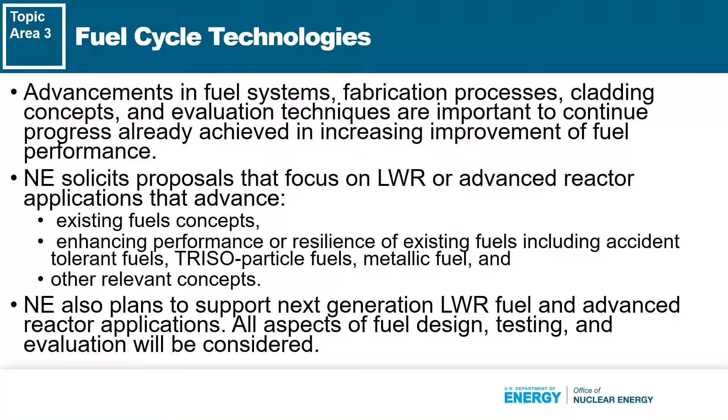The slide covers the DOE team up with industry focused on ATF. The industry partners, as you can see, are Framatome, GE, Westinghouse, and GA. Each vendor is pursuing their own designs, as example in this table. These technologies include coated zirconium claddings with and without doped UO2 pellets, use of FeCrAl cladding designs, and SiC cladding and higher density fuels. DOE is supporting each vendor in their research, development, and qualification efforts related to their individual designs. DOE develops and maintains fuel testing qualification infrastructure, performs independent testing and evaluation, and specific tests and PIE as requested.

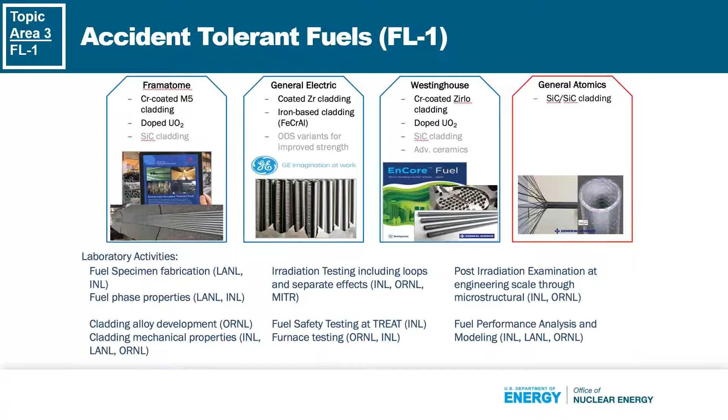This slide provides a high-level outline of suggested topic areas for university-led innovation that aligns nuclear energy research being conducted at US colleges and universities with DOE missions and goals. In practice, this generally means innovative solutions and research that looks to enhance the state of the art for a particular physical phenomenon identified by the researcher. NE's ATF fuel cycle research and development provides support to the industry in 3 major areas: in research, development, and qualification efforts.

One meaning to these terms are research, expanding the state of knowledge in a specific area by performing experiments, preferred and/or new evaluations of existing experimental data that create or expand existing models. Development may be implementation of innovative research concepts from an engineering perspective that incorporates integral effects, or the practical application of the innovative research. Qualification may be establishing safety-related performance boundaries or the demonstration of device processes, etc., to produce consistent outcomes of the required accuracy and precision.

Innovative NEUP proposals are suggested to fall into the research category, advancing the state of physics for a specific phenomena under appropriate conditions, while recognizing the applicant's freedom to be innovative in their submission. For FY23, NE is requesting innovative research that enhances safety and performance in the following suggested areas. The applicant is suggested to include the specific area of research, a discussion of the challenge and innovation proposed, discussion of the appropriate figures of merit, etc., to characterize their proposal.

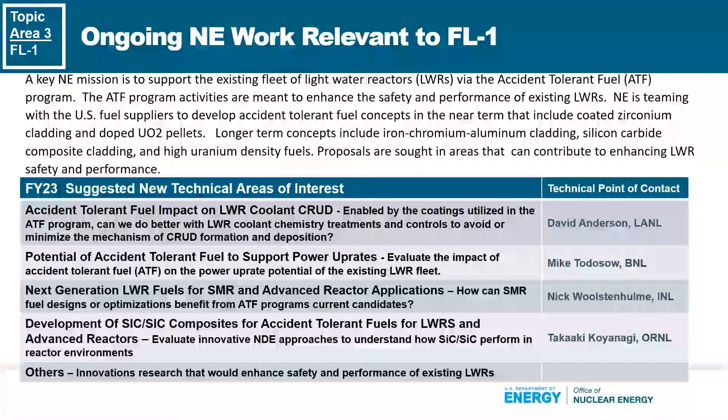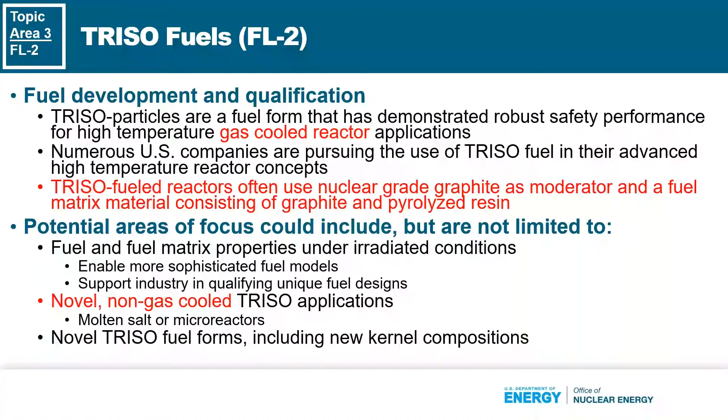Thank you. Okay. As I mentioned previously, industry is producing a broad range of TRISO-fueled reactor concepts. The following is just a sampling of a much larger set of exciting work that is happening. X-Energy is being funded through the DOE Advanced Reactor Demonstration Award. If you keep up with the news, you probably saw the announcement yesterday that X-Energy and Dow Chemical will collaborate to deploy the XE100 technology at one of Dow's US Gulf Coast sites. So that's very exciting.

Kairos Power is developing the Hermes TRISO-fueled reactor that uses a low-pressure fluoride salt coolant. BWXT is working on the BWXT Advanced Nuclear Reactor and Project Pele, both of which are micro-reactor configurations that use TRISO fuel. The latter design is funded by the Department of Defense Strategic Capabilities Office. So that's sort of the industry-wide picture.

Within the DOE's lab-directed work, the AGR campaign has and continues to hold critical importance. The current focus is the AGR 5/6/7 post-irradiation examination, safety testing, and reporting to include NRC licensing reports. Of particular importance are the capsule 1 analysis to investigate particle failures that appear to have been caused by thermocouple issues. AGR 5, 6, and 7 are of particular importance because the fuel produced at pilot scale is similar to the fuel that would be loaded into a commercial TRISO-fueled reactor.

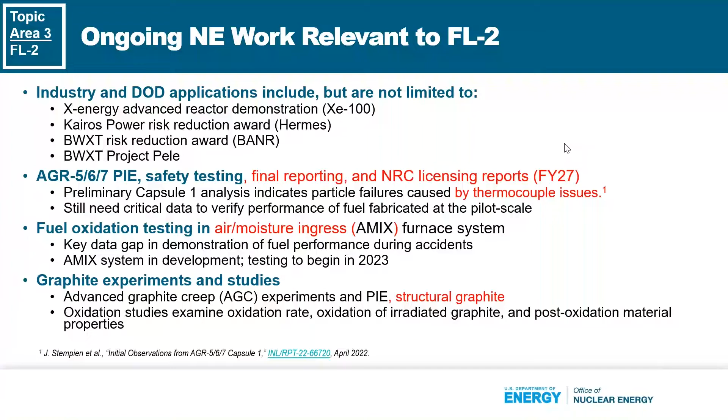Some areas not of interest. That first one, well, really all of these I'd like to explain a little bit. Heavy ion irradiation is something that we struggle with sometimes because we need to be able to show its equivalence to neutron irradiation to have useful test results. So if you're submitting a proposal that includes heavy ion irradiation, please be sure to explain how we would be able to show equivalence to neutron irradiation.

In addition, computer codes: we welcome proposals with computer codes, but keep in mind that we're looking for new work. So we're less interested in duplicating existing PARFUME and BISON models, but enhancements, especially for critical phenomena, would be very useful.

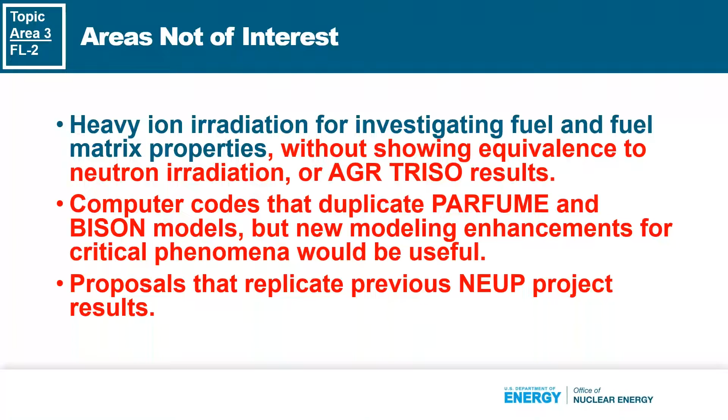And this last bit, I think, probably applies to all of the scopes. Please be mindful that we're looking for novel research rather than duplicating previous results. And I would encourage applicants to go to the NEUP website and ensure that you're able to distinguish what you're proposing relative to work that has already been done. And that's the end of my presentation.

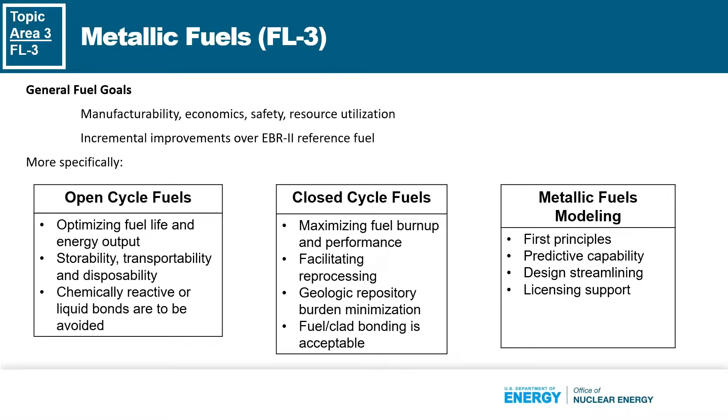And of note, in metallic fuels modeling, we're more interested not in computer code, but the modeling like Isaac Newton did, modeling orbital mechanics, coming up with the mathematical concepts and the physical principles. So we're interested in first principles, predictive capability, design streamlining. For example, alloys and cladding. It'd be great if we could have some modeling that would break through and get us out of the trial and error for cladding. And licensing support, of course. All these fuel concepts should be striving towards a future licensing. So that's it for that slide.

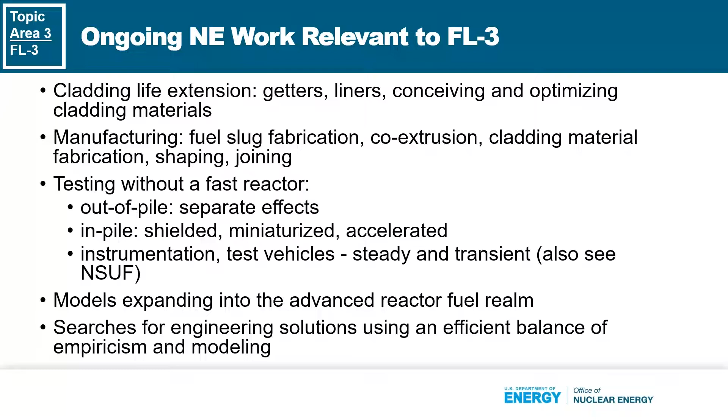We look for engineering solutions using an efficient balance of empiricism and modeling. If you have a cheap empirical way to get data and do research, you don't need to spend a lot of money on modeling, and vice versa. If you have expensive experimentation needed, modeling can really pay off. So that's our ongoing work. Next slide, please.

Here's some areas that we have less interest in: technologies related to the thorium fuel cycle. Thorium fuel cycle is technically viable, but as a friend told me, we have plenty of uranium. When the world starts running out of uranium, then we can take on the more challenging thorium fuel cycle. No need, so it's a low priority here for us.

We're not interested in propulsion fuel concepts, for example nuclear rocket motors, or new propulsion concepts. The once-through open cycle metal fuels are currently of higher interest because there's some commercial interest in those rather than a closed fuel cycle. However, we want steady, continuous contributions and improvement in the advanced closed cycle fuel concepts. That's ultimately going to be where we need to go if we do go nuclear, because closed fuel cycles maximize the fuel resource utilization.

We're also not interested in any concepts that propose enrichments greater than 20%. That's due to regulatory limits.

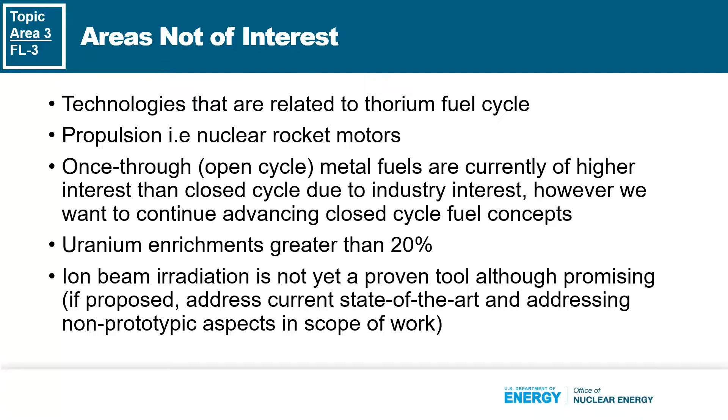As mentioned in the previous presentation, ion beam irradiation is not yet a proven tool. However, it is promising. So if you want to propose using heavy ion beam irradiation, your proposal should address the current state of the art and address all the non-prototypic aspects in the scope of work. How are you going to address those non-prototypic attributes? And I believe that's it for my slides. Thank you.